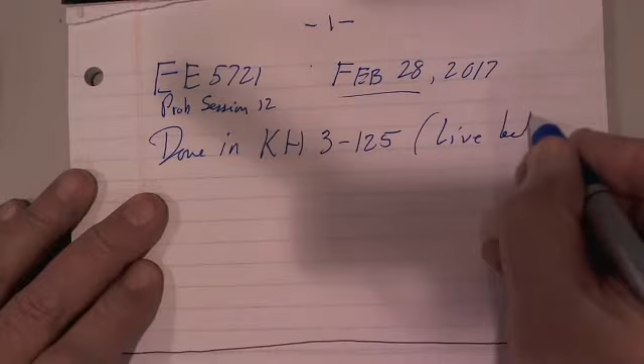Now, this is a video for problem session 12, and this was done, as I said here, February 28th, done in Keller Hall 3125, a live lecture. We did that so you could ask questions about the exam, which was given 2 days later. So what I'm doing here is just doing the lecture with the video, and I'm going to copy the notes so that you can have the same material that you would have had if we had done it by WebEx and recording.

The topic is network sensitivity factors. It requires the linear model, and one of the sensitivity factors that we're going to talk about is called a PTDF, power transfer distribution factor.

Now, the idea is, suppose I have a bus over here with a generator on it. I have another bus over here with a load on it, and I'm going to transfer 100 megawatts. I'm going to send it into the bus here, and I'm going to receive it over here. So we call this the send, and this the receive. There's 100. Now, in the middle is hundreds or thousands of transmission lines.

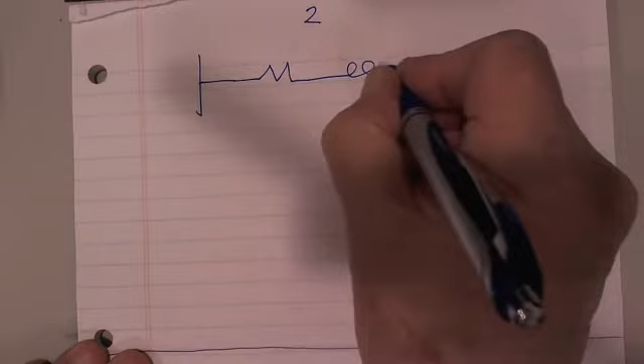Now, we're going to use the linear power flow. I'm going to go back over that for you. You know, the representation of a transmission line in per unit system in an AC system looks like this.

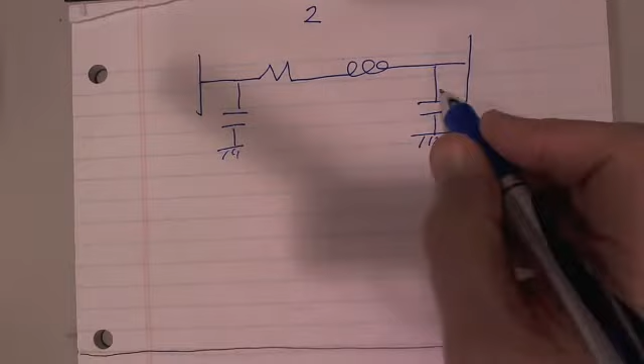Now the capacitance is literally the capacitance between the wire and the ground. This represents the resistance in the wire itself, and this represents the inductance. Even though you don't see a lot of turns, there's inductance, there's series inductance. So there's an Rij, an Xij, and then this has got a capacitance. See, I just like to say jB cap ij, jB cap ij. This is i, and that's j.

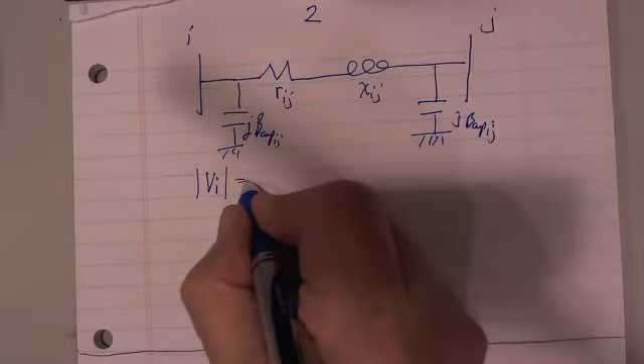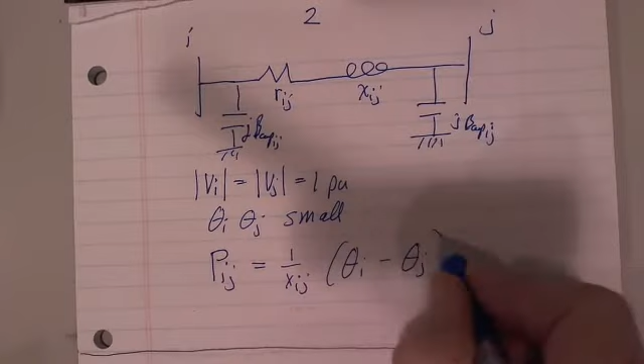Now, if we say Vi and Vj are identically 1 per unit, and we say theta i and theta j are small, and you can find papers that'll discuss this, how small and what kind of errors to expect. In any event, we can then come up and say Pij is 1 over Xij times theta i minus theta j, where these are in radians. Both of these are radians. This is the per unit, and this is per unit

megawatt only. Okay, now you know that in reality we have a voltage magnitude Vi and a theta i, and we have Vj and theta j, and we have Pij, and we have another arrow that's got a little cross member like this, that's Qij, the reactive power. We are ignoring the voltage magnitudes. We are ignoring the reactive power. We are ignoring the resistance. We are ignoring the capacitance.

But this approximation is about plus minus 5%. That's a number that we kind of, it's more of a belief than anything. No, but it's a reasonable assumption. If the voltages are way different than 1, the phase angles are not small, etc., then this thing can have a much worse error. Okay,

so let's take our little 3-bus system here, and we've got 1, 2, 3. Now, for the sake of analysis, you can draw what I call the injection, P1, P2, P3. It's always the net power into the bus. If the bus has a generator and a load, and let's say this is bus i, then this is Pi, and Pi will equal P-gen minus P-load.

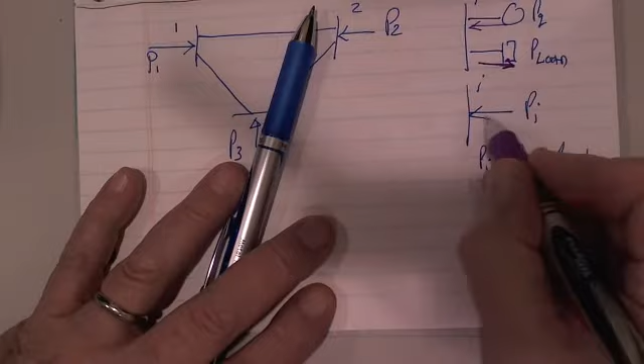Because the power from the generator goes in, whereas the power to the load comes out, and we're just saying Pi is the power into the bus, which is then the power that goes out, summed over all of those lines. Okay, so P1 is P12 plus P13. So here's P12 and P13, and that's equal to 1 over x12 times theta 1 minus theta 2 plus 1 over x13 times theta 1 minus theta 3. That's the individual.

Here's the x12, x13, x23. Now I'm going to gather the terms. It's always better to gather the terms up so we end up with a linear equation that can be put in a matrix. 1 over x12 plus 1 over x13 times theta 1, minus 1 over x12 theta 2, minus 1 over x13 theta 3. And I'm going to do this with all 3 buses. And I'm going to end up with something times theta 1, something times theta 2, something times theta 3.

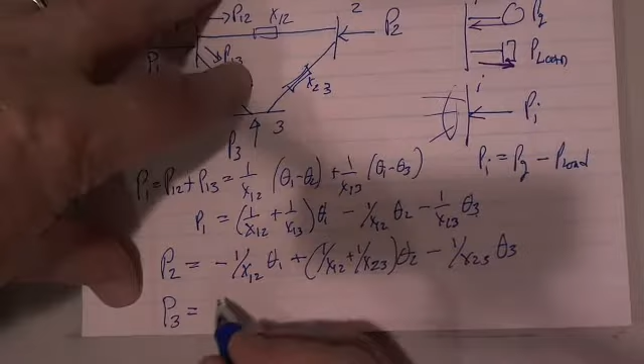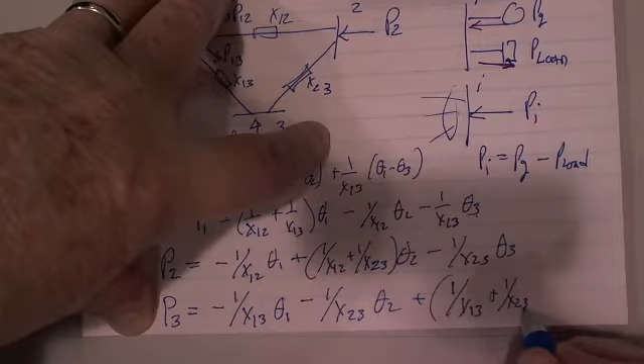you want to. So then this one becomes minus 1 over x13 theta 1, minus 1 over x23 theta 2, plus 1 over x13 plus 1 over x23 theta 3. So there's the three equations of the linear network. And what we want to do now is form them into a matrix like this:

1 over x12 plus 1 over x13, and that's minus 1 over x12, minus 1 over x13. Minus 1 over x12. Plus 1 over x12 plus 1 over x23. All I'm doing is just picking off all the terms. Minus 1 over x13. 1 over x13 plus 1 over x23. Theta 1, theta 2, theta 3. I made those three equations into a matrix that I call B sub x. Excuse me, B sub x.

And so I can say a vector P is equal to B sub x times a vector theta. And that's that equation, like that. The B sub x matrix is n by n, where n equals the number of buses. Okay?

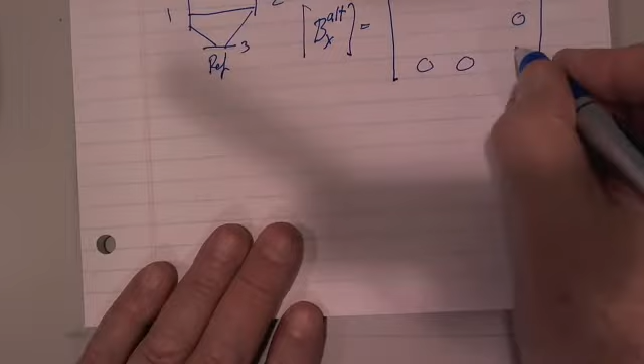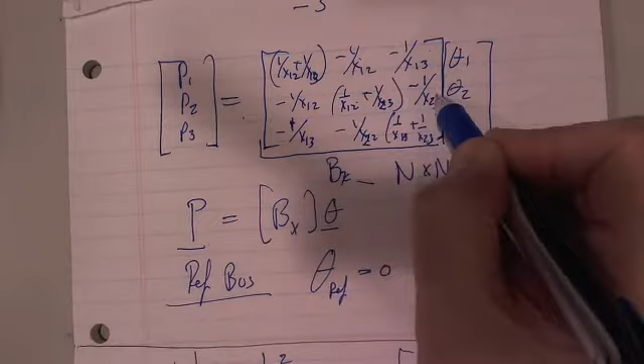If you go back to this matrix up here and you try to invert it, you will get an error. If I took the first 2 rows and just simply added them together, am I correct on that? This should be 2, 3, yeah. If I took the first 2 rows and added them together, I'd get the third row. So that's the definition of a singular matrix. If there's a linear dependency between rows, you can't invert the matrix. Okay? So, therefore, I have to do something. And the something is to declare theta 3 equals 0.

Now, I'm going to give you this speech over again several times. I could simply eliminate the third bus out of the equation. I could come up here and say, well, just forget the third bus and the P3, forget the theta 3, and I have a 2x2 system of equations. That might look easy because here I picked the last bus. If you have a large network and you have a reference bus that's not number 1 or number n, but something in the middle, then you form the B sub x, and then you pull the rows and columns out of it and kind of push it back together again. You can do that with computer programs.

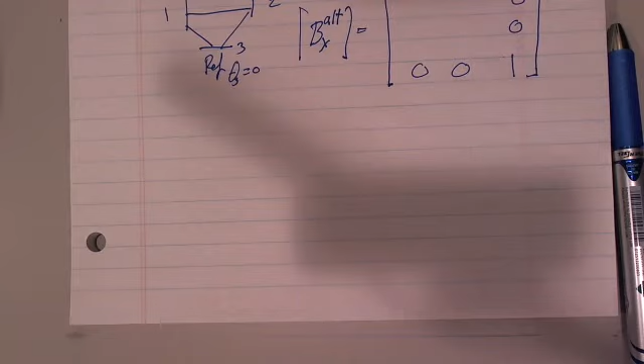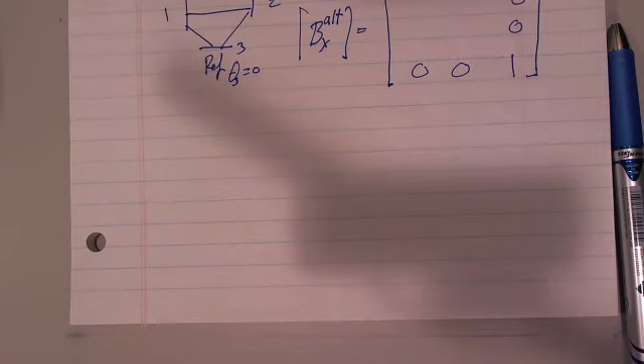You can do that. But I guarantee you will spend half your life debugging the program because you're compressing the rows and columns, and then you have to remember, now let's see, the reference bus is number 100, but we eliminated it, so what is now 100 is really 101. You go crazy. And much of the gray hair on my head is because I used to do that kind of thing. I used to try to reorder things to get rid of the reference bus and so forth, and it's not necessary. You're better off to do this. It's a perfect placeholder, and it makes the matrix non-singular. You can invert it, and it holds the place, and it solves for the reference bus.

So all we have to do now, this of course is 1 over x12 plus 1 over x13, minus 1 over x12, 1 over x12 plus 1 over x23. Whoop, this is x. 1 over x23. And these are zeros, and that's a 1. And now when I do this, I have a matrix.

B alt can be inverted, so now I can write theta 1, theta 2, theta 3 is equal to Bx alt inverse times P1, P2, P3. Now, I know that this is 0. Theoretically, I don't know what this value is. And when you invert this, you still get the zeros and ones. So then I should say, does this equal 0? And the answer is not necessarily.

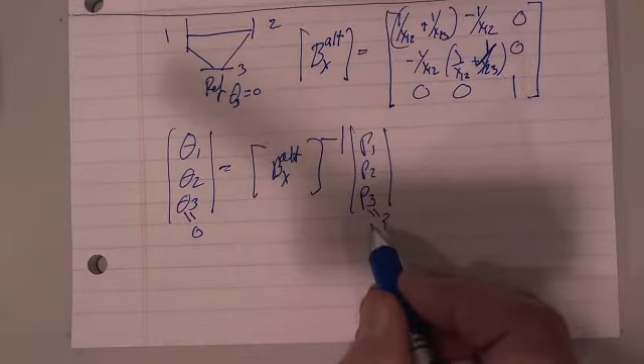The idea is that you're not going to try to solve for the reference bus power with this equation. It doesn't matter what you put in there. We're going to force theta 3 equal to 0. So I don't really care what I put in here, but you have to put the P1 and the P2 value, and you'll get theta 1 and theta 2. And it turns out that P3 is always equal to minus P1 minus P2, because they always add up to 0. There are no losses in this linear network.

That's a minor point, but by putting in P1 and P2, I can solve for theta 1 and theta 2. If I have theta 1 and theta 2, and I know theta 3 is 0, I can solve for the power flowing. I can draw the flows out here, solve for each flow, and get the reference bus flow. Okay? Minor point.

Now, there are some other things we need to note here. This is page 4. Linear power flow: no losses. So if you are doing a problem where you have to take into account losses, then you probably want an AC power flow. There were a number of papers written in the 1950s and 1960s that showed approximate loss models based on the linear power flow. Those have gone completely out of favor as far as I'm concerned.

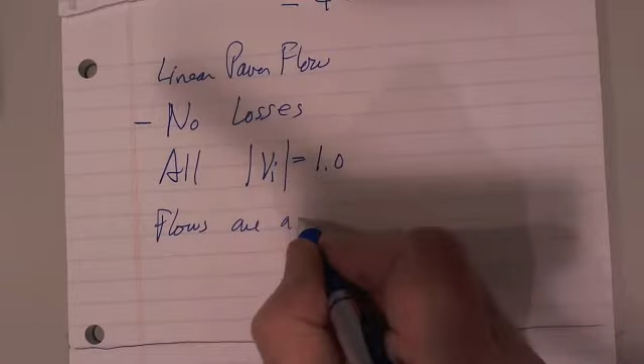So there are no losses. All voltages equal 1.0, which we know is wrong. Okay, the flows are accurate to plus and minus 5%, maybe plus and minus 10%, definitely. But that's not very good if you're really looking for a precise flow. You need an AC power flow. So that's kind of the bad news.

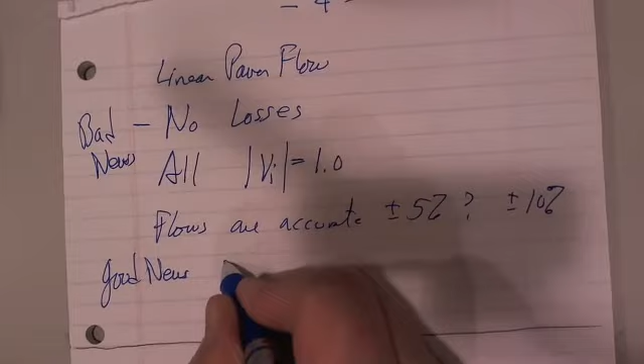The good news is that the linear power flow is very fast. And I can do all this nice sensitivity analysis that I can't do with AC.

All right, so let's look at our PTDF factor here. Here's S, the send bus, and I'm going to put delta P in here, and here's the receive bus into the load, and I'm going to get delta P into the receive bus. Here's R. And here's my line over here that goes from I to J, and this will be line L. So I want to know what is the PTDF from S to R onto line L. We're going to order it that way.

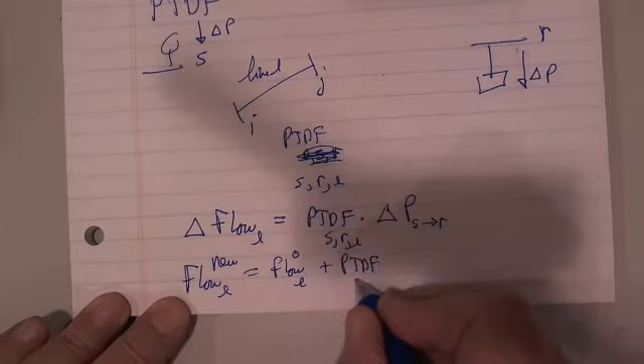So the equation is that the change in flow on line L is equal to PTDF SRL times delta P, going from S to R. And the flow L new is flow L original plus PTDF SRL times delta P, S to R.

Now, under what circumstance would you use these factors? It turns out there are a lot of uses for them, but one of them is our present open access markets, what are often called deregulated power systems.

It was originally that the utility had a license to sell power in a certain area, let's say a state, and all the loads in the state had to buy from that electric company. No choice. The electric company owned the generators, the transmission lines, the distribution system, right up to the transformer at your house, and you had to buy from them or you just didn't get electricity. You didn't have to buy, but that's the only one you could get it from, unless you wanted to generate yourself, which would be too expensive.

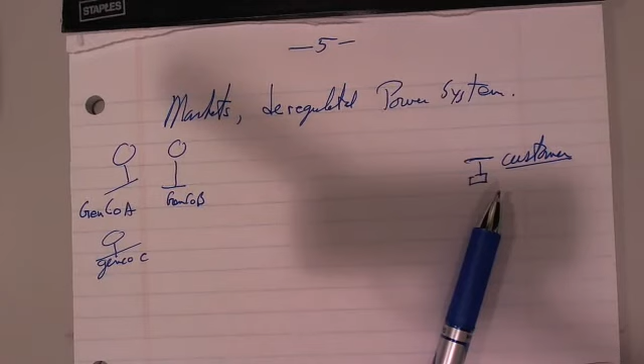Well, now I can have multiple generators: generator company A, generator company B, and we'll draw a third one, Genco C, and over here is a customer. And the customer wants to buy some power. Well, before the transmission operator or the ISO sets up everything, the customer gets a phone call from each of these guys. They communicate and they bid. They say, listen, we'll sell you.

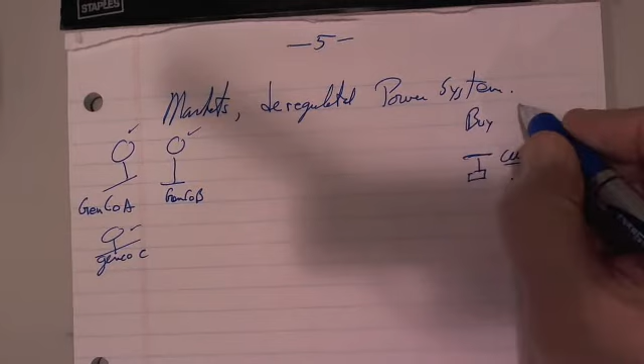Well, the customer has posted someplace, I want to buy, let's make it easy, 100 megawatts from 2 to 3 p.m. on Friday.

And they each bid, and they give him different prices. And so the customer picks the lowest price. Now that's the first step. The problem is, so let's say that B was the lowest price. So now he's going to be the S bus, the send. And he is the receive,

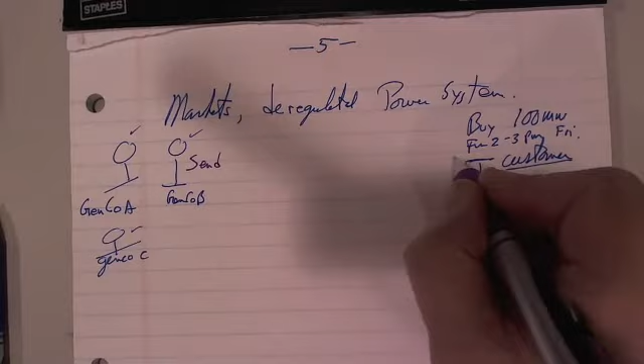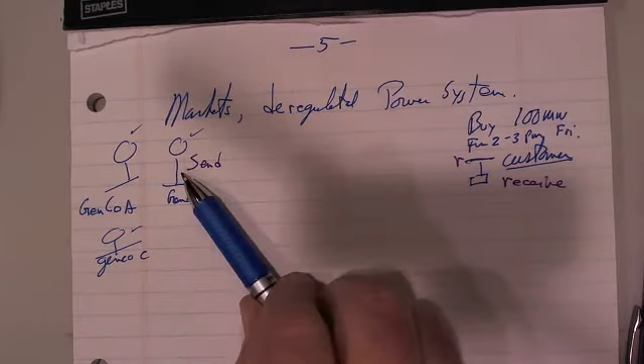or the R bus. So he's got a supplier who has an extra 100 megawatts that they can sell from their generator at 2 to 3 p.m. on Friday. The question is, can this 100 megawatts get through the transmission system to the receiver? Can it get through there?

Now this is called a bilateral transaction, for the obvious reason that you've got a seller and a buyer. You get two companies, two people. Let's say they're companies. The customer over here, if he's going to buy 100 megawatts, let's say it's a big industrial plant. Now, the question being, can I get the power through? If you're really close, that may not be a problem.

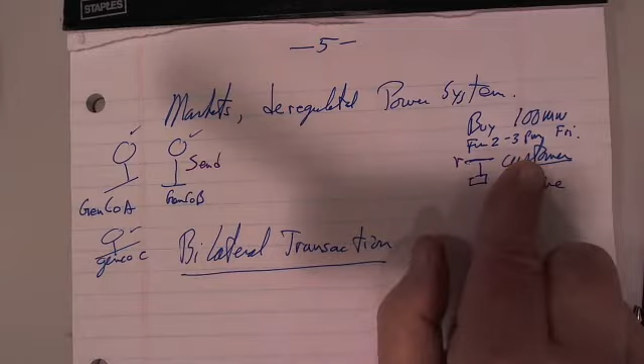But suppose he's a customer in Ohio, and the generator is a generating company in Minnesota. If you just think about a map of the U.S. for a while, that power has to go through transmission lines that are going to bend around the bottom of Lake Michigan and go over to Ohio. Some of them are going to go through Minnesota to Iowa, and then go from Iowa through Illinois and back up into Ohio. But there's many, many, many paths.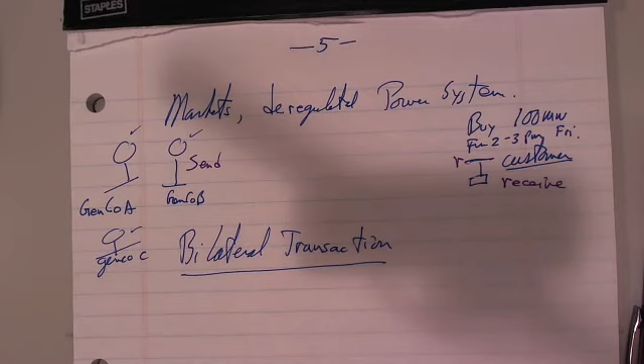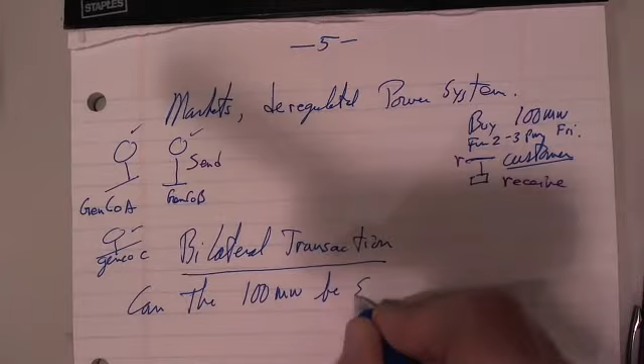And the problem is, can the 100 megawatts be sent from S to R? Here's the S bus over here. From S to R without overloading anything.

Well, the first thing that has to happen is that somebody has to have a big database that says, well, how much load is going to be on the system, and they have to estimate that, and they do that by looking at all of the bilateral transactions that are out there and adding them all up. And if you're the first one, if you're not the first one, well then you don't get, so there's issues of who gets in there first and who doesn't.

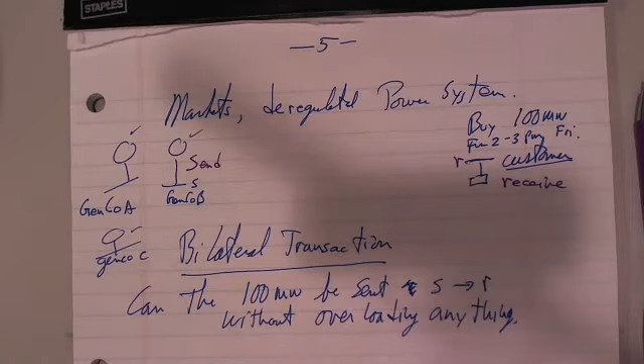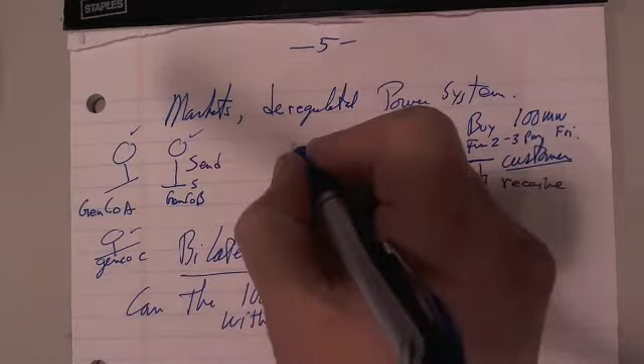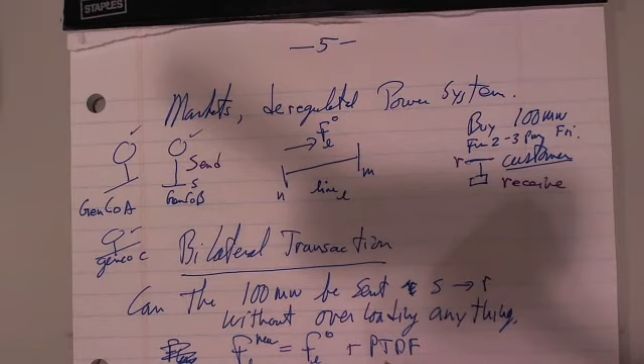But the whole point is, if I've got this line out here, and I know this is line L, and there's an initial flow, I'll just write F sub L 0 from N to M. How much is this 100 megawatts going to add to this line? Well, if I've calculated the PTDF, then I just simply say FL new equals FL original plus PTDF, S to R for line L, times delta P, which in this case delta P equals 100 megawatts. And this is a fraction.

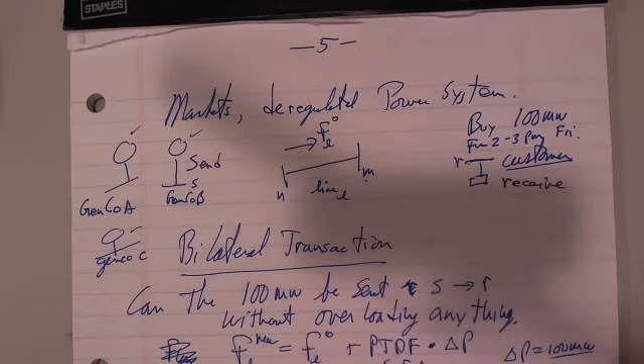It's a fraction. It can go negative, and the only reason it can go negative is you see NM. Well, if I describe this line as being from M to N, then the flow in this direction will be considered a negative flow. That's a minor point, but you should know this PTDF can go between plus and minus 1. So it's a fractional number. So PTDF is from minus 1 to plus 1. Okay? Minus 1 to plus 1.

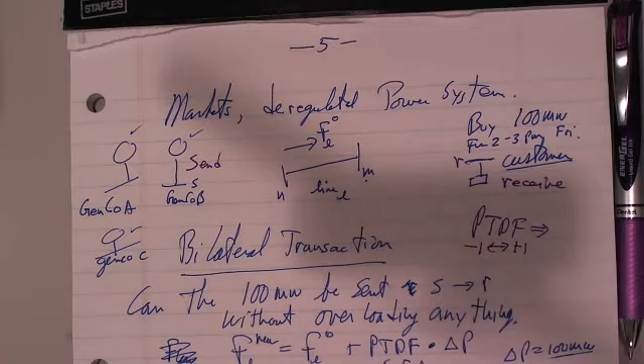So now, how do I calculate that? And actually, it's very simple. I'm going to take the inverse of my B sub x matrix. Now, let's assume that we've done the zero out. I'm going to take B sub x, alter it by zeroing a row and column out, invert it, and because this had 1 over x's in it, now this one will have x's, so we call that cap X matrix, okay? B sub x becomes this by zeroing the row and column out.

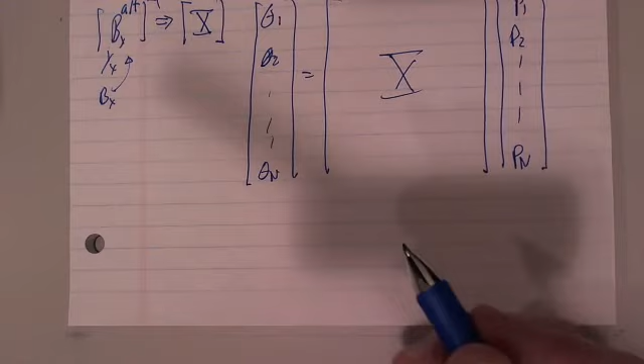So then theta 1, theta 2, all the way down to theta n equals X times P1, P2, Pn. Now, what I really want to know is something about delta P. And it turns out that if it's a linear system, I can write this equation with deltas, and I get the same equation.

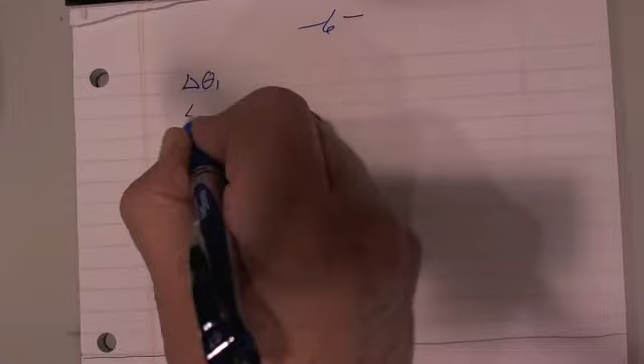And I can write delta theta 1, delta theta 2, delta theta n. It's still the same matrix. Delta P1, delta P2, delta Pn. But now I'm going to say, well, look, if this is S up here and this is R down here, then I'm going to say that all of these equal 0. They don't do anything, except delta PS, the sending bus, becomes a plus 1, and delta PR becomes minus 1. So this is a plus 1, this is a minus 1, everything else is 0.

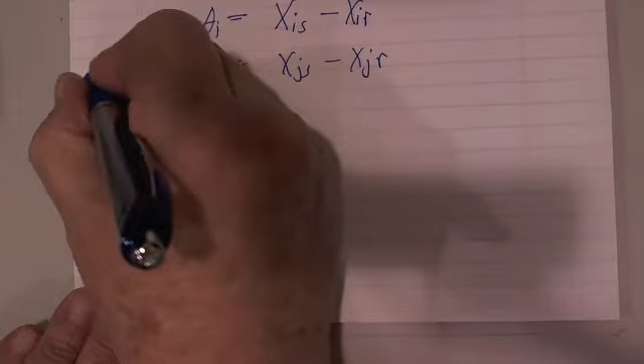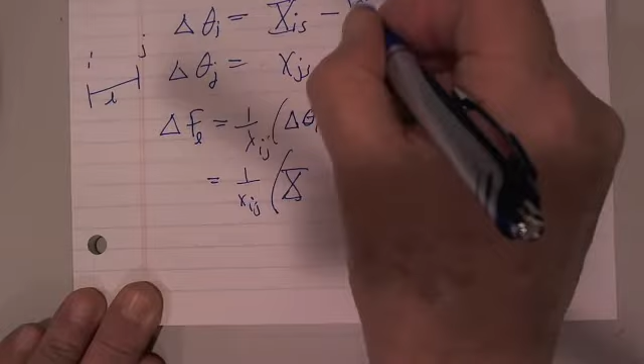Delta theta I equals XIS minus XIR. Delta theta J equals XJS minus XJR. Therefore, the change in flow on line L, and we'll just assume that line L goes I to J, is 1 over Xij times delta theta I minus delta theta J. So this is then 1 over Xij up here. I should put these big lines so that you know that these are terms from the X matrix. These numbers here came from that matrix.

So it's XIS minus XIR, minus XJS minus XJR. Oh, I'm sorry, I don't need that term, I've got that bracket. And we'll put a big square bracket around it here, with the 1 over Xij for the line itself, and then I have to get 4 terms out of that X matrix, and that delta FL is the PTDF from S to R for line L. And it's that simple.

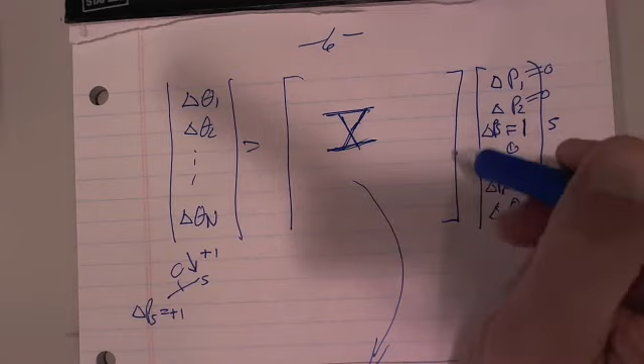Now, people, this is an example where you do not want to calculate the entire inverse. In fact, this is row I, column S, row I, column R. So I can get both of those terms from row I, and both of these terms from row J. And it's very easy to calculate just the row of an inverse matrix. In this case I need 2 rows of the inverse matrix, and I don't need all the other terms. I need 2 rows for each of these PTDFs.

So I'm not going to get into that. We had a separate course on sparse matrix techniques and so forth, but I'm not going to go into that right now. But for PTDF, you don't want the entire X matrix. Although if I'm doing a little MATLAB program, I probably would just generate the inverse itself. There's a couple of rules that I want to make sure that we understand.

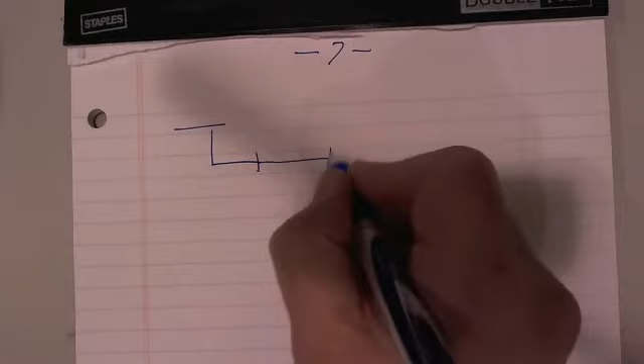Suppose I have this. These lines, I call them radial. So here's line L, here's line K, and this goes from I to J and from N to M. Suppose this is S and this is R. The PTDF from S to R for L equals plus 1 because all the power goes through there. And the PTDF from S to R for K is equal to 0. None of the power, if there's a generator here and a load here, will flow through this radial line. Therefore, it's 0.

And in the book, we issue some warnings about that. The codes that I have for those things, you have to recognize that specifically, and you have to be able to find the radial lines. Otherwise, you might get some divide by zeros.

All right, next is my LODF. The LODF is technically the change in the flow on line L divided by the original flow on K. So this is the flow that's dropped. FK is the flow on K before it opens.

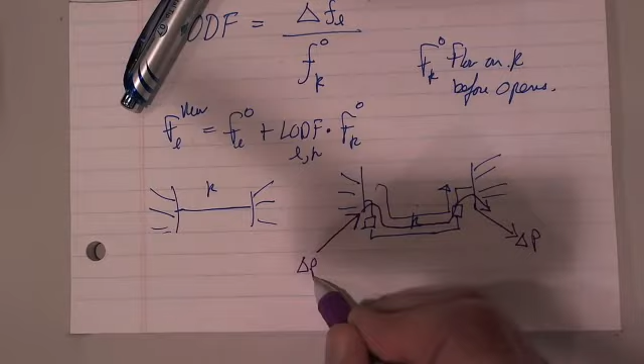Some of this power will flow out into the network and back in over here. What I want to do is make sure that what's flowing through these breakers is 0. So I'm going to run this up and down, and this will go up and down in the same proportion, except this one is coming out and this one is going in. As I said, some of the power goes around and comes back in the other way. That's okay. Once I get the power in here, the P in the breaker equal to 0. Same thing over here. Then it's got 0 power flowing through the breakers. It doesn't matter if the breaker opens or not.

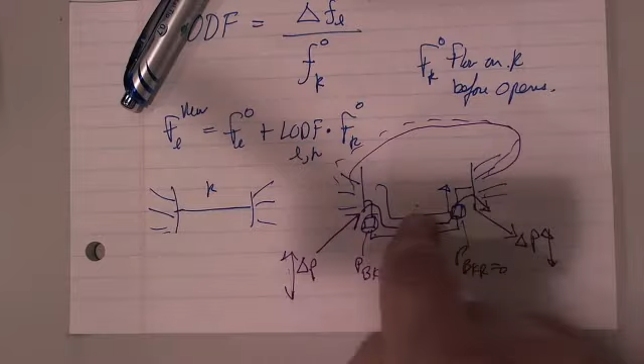I said I was going to leave the line in, but if there's no power flowing through it, then these powers here can be used to calculate what happens to everything else on the system when you open this line. And you can see the logic gets into not pages, but a couple of pages of algebra. But it's in the textbook.

Now, there's a couple things I wanted to warn you. PTDF, LODF must be recalculated if the network changes. So if you open up a line, then all the PTDFs and all the LODFs are going to change. That's strictly not true. Some of them may not change, but you might as well figure that they're all going

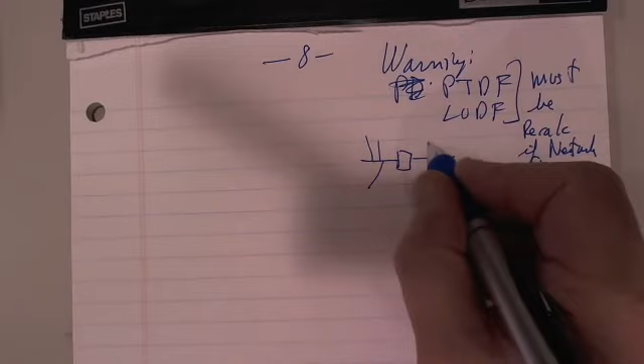to change. If you open a line, if you split a bus, if you have a bus with a breaker like this, and you have 2 lines coming in here and a third one, and maybe this one just has one going in and one going out. This is normally one bus, and then I open that breaker, so I now have 2 buses. Then you have to recalculate all of the PTDF and LODF values. That's a distinct disadvantage.

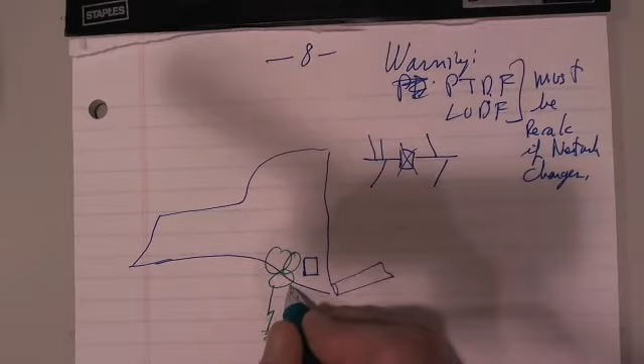I like to tell the story that in here's New York State. Here's Long Island going up like this. Here's New York. I used to live there, so my maps of New York are probably much more accurate than they are in Minnesota. And right in this region, there was a substation. And one Sunday, a great big electrical storm. Boom. Boom. Lightning striking. And the storm came over the substation and struck one of the lines, and a line opened.

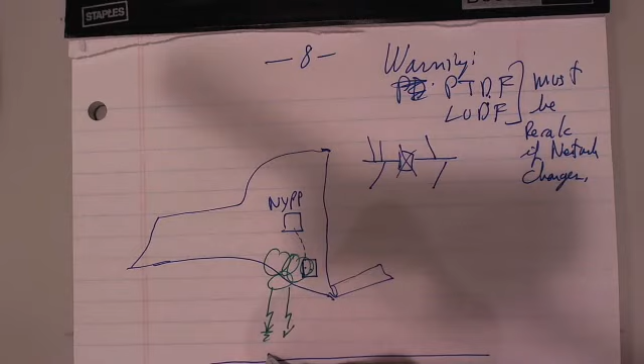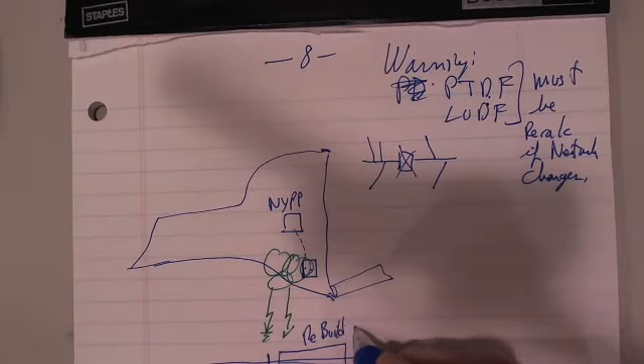So up in the Albany, New York area was what was called the New York Power Pool, which controlled all the power flow in New York. It was built to study security and so forth. Well, it found out that there had been a line opening, and so on a timeline like this, here you've got the strike, and they started a process of rebuilding PTDFs, LODFs. They wanted to do contingency analysis after this line went out, so they started rebuilding them.

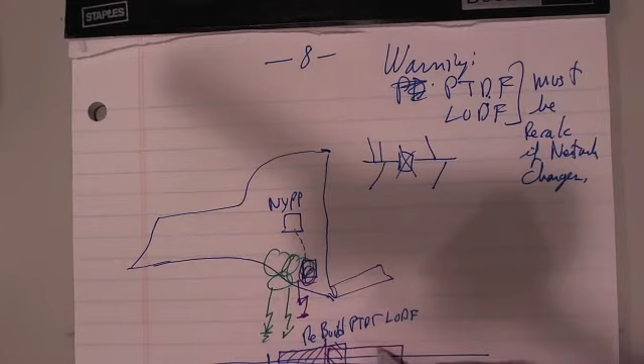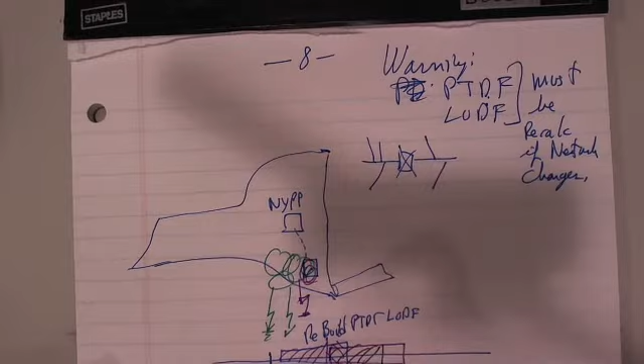And the problem is, they're right in the middle of the rebuild, they got another strike. So I'm doing that with the purple. And so right here, you got to stop. Everything you did is no good, and you might as well discontinue and start recalculating again. And I think that they did that a couple times. The computer systems simply got part of the way through again. So you had a long period of time while they're recalculating the factors,

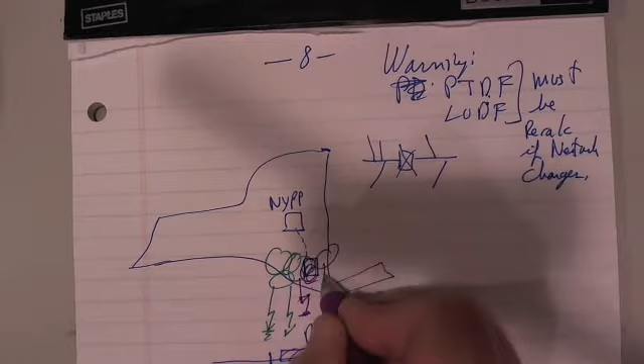and then there was a third strike over here, and the net result was that there was a lot of power coming across New York State from the Niagara Falls generators, down from Canada, from the Massena plants, into New York City.

This substation completely opened up. They cut it off, and New York City had a blackout. And it was one of the worst that we've had in the United States from the following viewpoint. It was a hot, humid Sunday afternoon, and the power went out. People went out on the streets. Their air conditioning was off, and there was rioting. There was looting. It was a terrible thing.

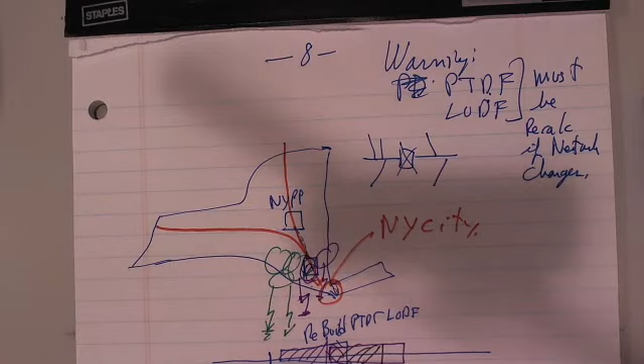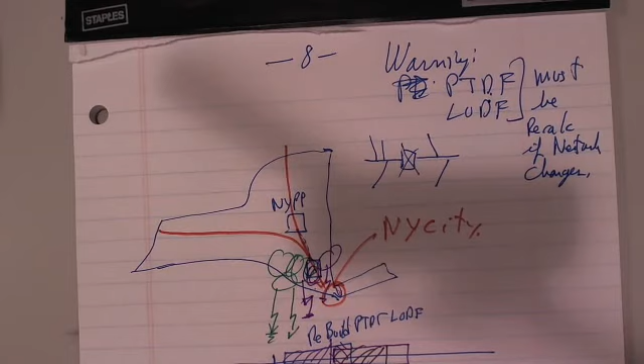One of the first blackouts, I think, and maybe one of the last, where there was widespread looting of stores and so forth. The police couldn't keep up with it. And that was because they had to recalculate these factors. Today you have much better computers, much faster computers, and better techniques than to calculate all these factors every single time. So be that as it may, we don't do that anymore. But that's one of the disadvantages.

Now, another thing is, suppose I'm back to this bilateral transaction business again, and here's my generator S, and here's my customer over here, the receiving point R, and I've got line L. I can calculate the PTDF, okay, for this line. And I've also got a line K over here.

So let's say if I put the transaction on, then FL new equals FL old plus PTDF. Now again, it's S to R for L times, this is the delta P, S to R. Remember, this is delta P, and delta P is coming out here. And FK new equals FK old plus PTDF, only this is S to R for K, and it's the same delta P, S to R. I can tell you how much of this gets on this line and how much this one changes.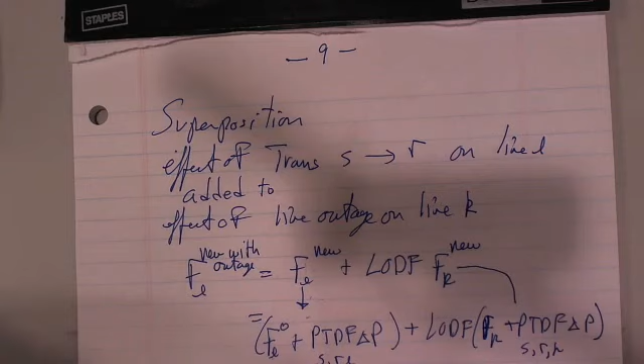Well, this is equal to FL0 plus PTDF S to R, L times delta P, plus LODF times FK plus PTDF S to R, K delta P. So all I did was take the flow values that were determined by the PTDFs. We did that on the previous page. The PTDF tells me how the transaction affects line L and how it affects line K. And then I can just insert those values into the LODF.

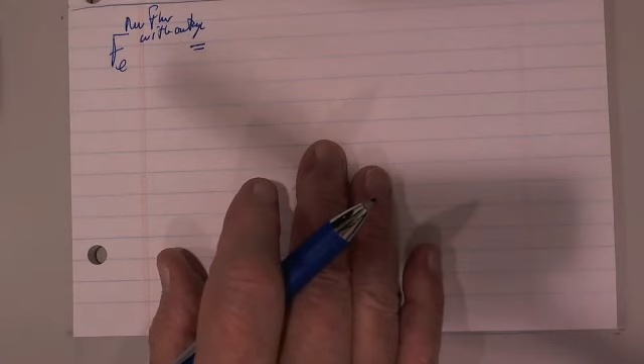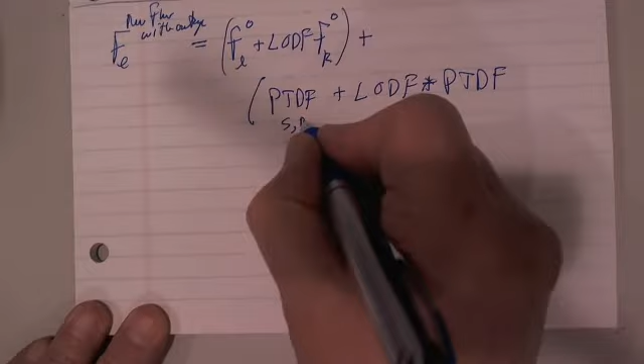And if you do this, you can say, look, FL new flow with outage is going to equal F0 plus LODF times FK0 plus PTDF S R L plus LODF L K times PTDF S R K, and then that's times delta P. This factor now tells me, given the transaction amount, how much do I expect that to change the flow on L.

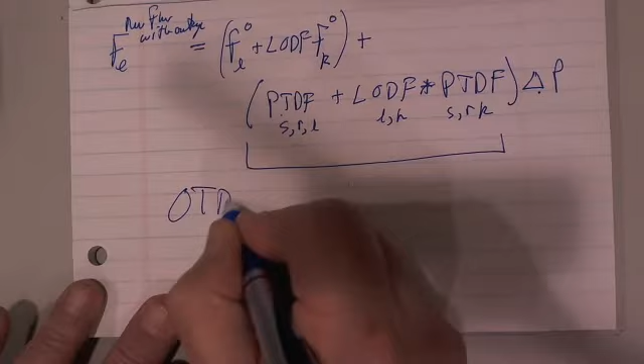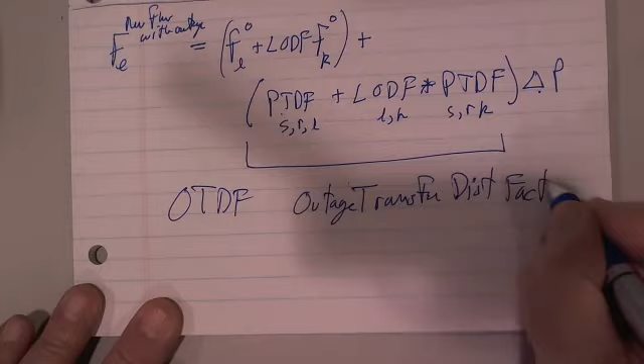And so they sometimes call this an OTDF, or outage transfer distribution factor. OTDF, you'll hear it referred to as that. Now, why would you want to do that? Well, again, if I'm doing a bilateral transaction, and actually this is the rule, they tell you you cannot add it on if any first contingency flow with the transaction will result in an overload. Any first contingency, that's the line K out, will then result in an overload when you have added your transaction. So that's one of the problems that you have.

There's one other kind of factor that I'm gonna talk about, because it's gonna come up later on in the course, so I might as well get it out here. And that's called the A factor. How did it get the letter A? I don't know. I used it in the very first edition of the book, but I think I got it out of a technical paper. But here we want to develop something called the flow matrix.

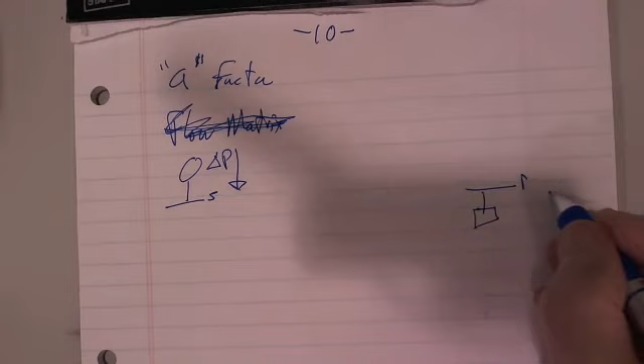I'm sorry, I don't need to talk about the flow matrix. I'll come back to that next. But let's just take, and we're going to say here's our transaction from S to R. Delta P going in, and delta P coming out over here.

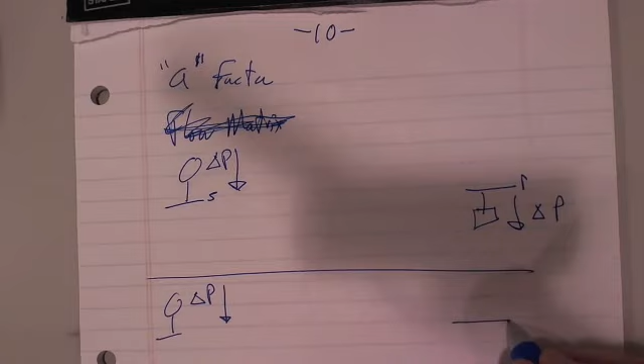And what I'd like to know is, suppose I don't do it this way. Suppose I do it this way. Delta P, power going in, and over here is the reference bus. And so if this is delta P, then the reference bus responds in the opposite direction. And therefore, all I've done is I've increased the power out here and the reference decreased.

Okay, and then line L, I to J. And it turns out that the A factor is FL new equals FL old plus A L S. This is S. It's all the reference bus. That's just the reference bus times delta P.

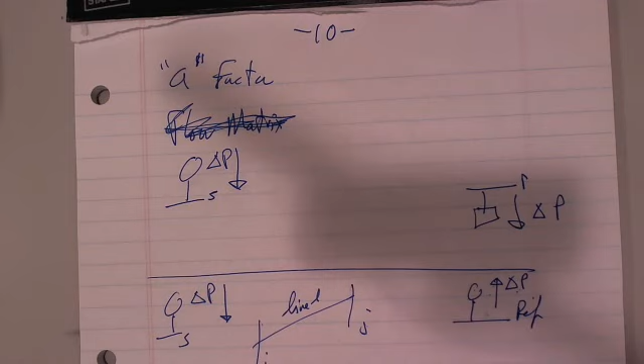Okay. Now, in the formulation that we had for the PTDF, remember, we had capital X's. We had 4 of them. Here you're only going to get 2 terms because you have delta theta 1, delta theta 2, and so forth, and you have your capital X's, X11, X12, etc.

And then over here, remember that someplace in here, I've got zeros for my reference bus. So this is the reference bus, and so here's the P ref. Well, I don't need to worry about it. So I'm just going to take at the S here, I'm going to put a +1. And this one I don't care. In fact, I should probably just put a 0 there.

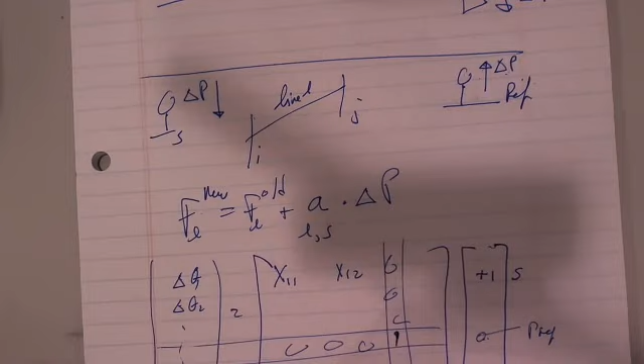Well, then the changes, delta theta I is X I S times this 1 over here, and delta theta J is X J S. So then the A factor is simply 1 over Xij times Xis minus Xjs. That's it. It only needs 2 of these cap X terms here. I didn't put the top and bottom on them. There it is. So that's the A.

So A simply is the same thing as we had from going in here and out here, but it's in here and out the reference, and it's a simplified version of the PTDF. The other thing that's going to come up, and we will see it in the homework that's going to be issued in a week or so here, is something called the flow matrix.

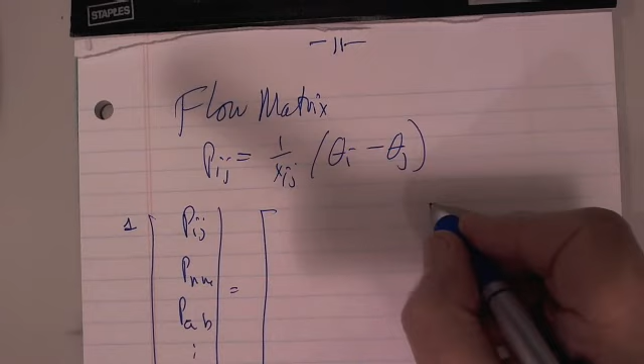Well, if the flow Pij equals 1 over Xij times theta I minus theta j, then here's the flow. Here's Pij and Pnm and Pab, etc. Here's all the flows. So here's 1 to number of lines. And we've got a matrix over here. And theta 1, theta 2. This isn't as long, I should have drawn it shorter here. So this goes from 1 to n, where n equals the number of buses.

And then wherever I have a row, I'll have 1 over xij and minus 1 over xij in column I and column j. This one will have 1 over xnm and minus 1 over xnm in columns n and m. And then let's say a and b are out here. A and b will have 1 over xab and minus 1 over xab.

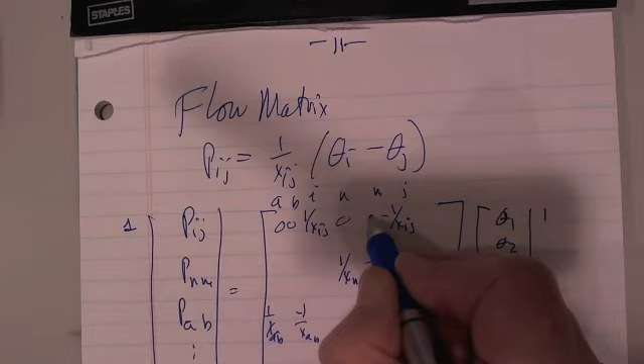And therefore, when I multiply this, everything else in here is 0 except those terms, and each row has only 2 terms. All else equals 0, and so it's n lines by n buses, if you will. And that's the flow matrix. You multiply it by the phase angles, and you get the flows. Now that turns out to be a very useful matrix. Later on, we'll be using that in some of our other calculations.

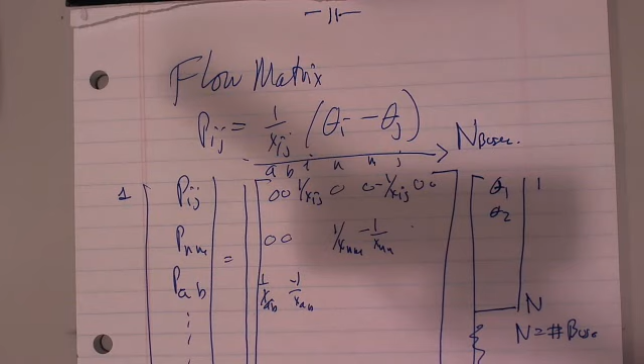Okay, so that's the short form of the lecture that you received on February 28th.